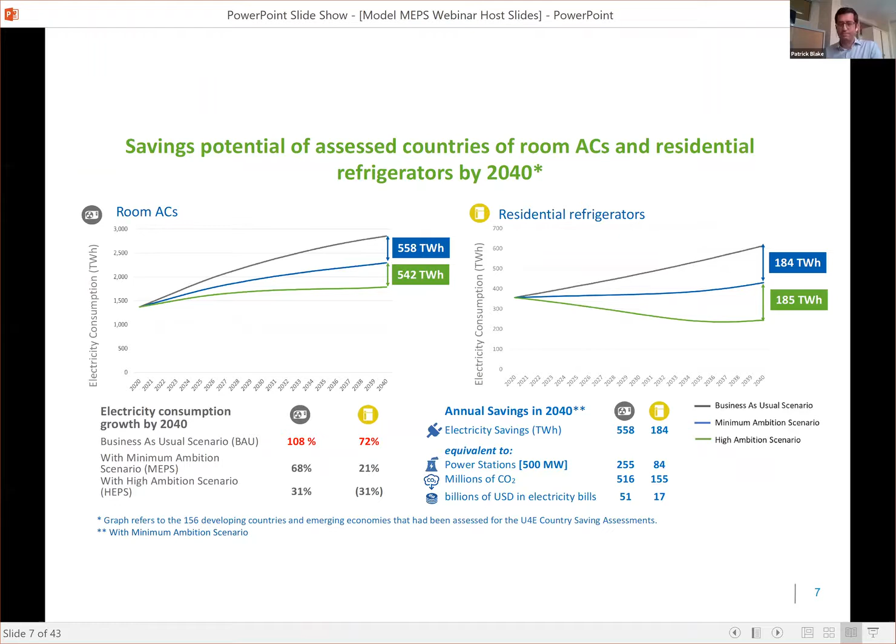By implementing minimum energy performance standards, particularly in the time with the COVID recovery, this allows for very quick savings opportunities for countries to help their consumers. Continuing on, please.

And we're working, and other organizations are working with individual countries, but also regional groups of countries to support them. And we'll hear more from Michael Kiza on the work in East and Southern Africa later today. Next slide, please.

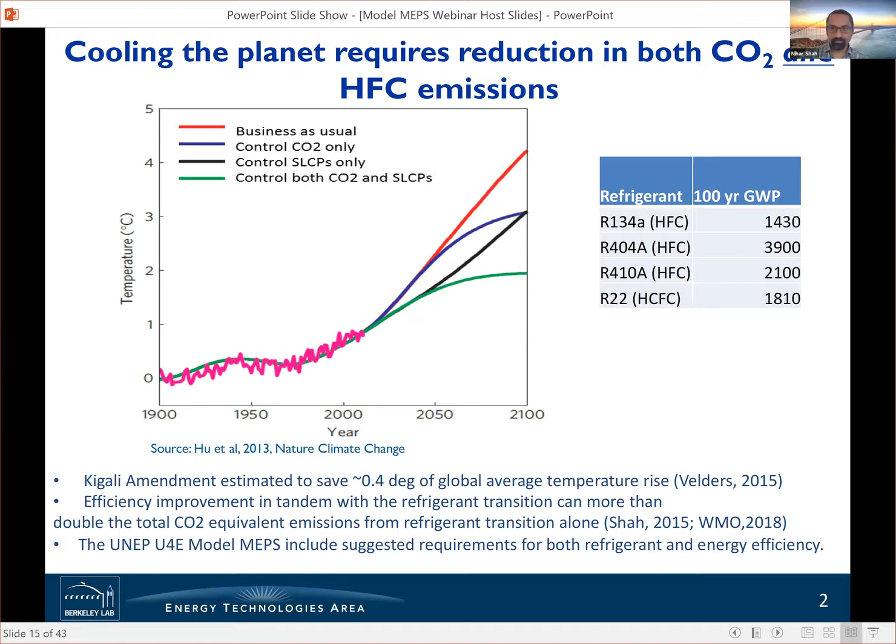So it's really important for us to manage peak load and to reduce the greenhouse gas emissions I mentioned previously, and that Patrick mentioned, to address both energy efficiency and refrigerant transition together. As Patrick mentioned, the savings, he had a number up to 2040, I have the number up to 2030 for air conditioners alone. Whichever way you slice this, this is a pretty big number, about 337 terawatt hours, which is about 154 medium-sized power plants. That would be a very large shift if we could actually pull it off.

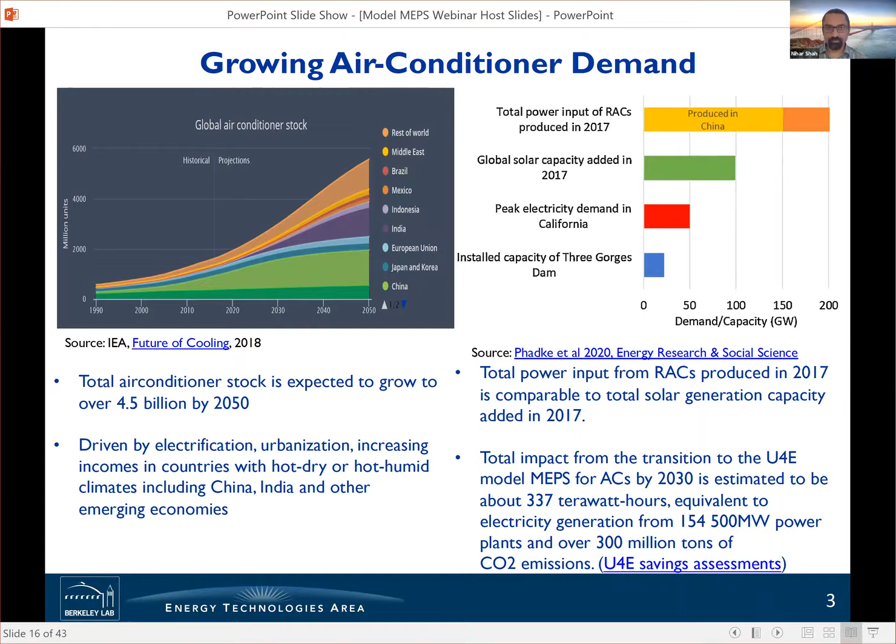Now, why would we want to do refrigerant transition and energy efficiency together? Air conditioners and fridges are often the first products regulated for energy efficiency. When you go to one of those countries that was a blank spot on the map, typically they'll ask what do you want to regulate first. They'll raise their hand and say air conditioners and fridges, because those are typically the ones that are widely deployed and also consuming a lot of energy in the household.

Also, both refrigerant transition and energy efficiency require redesign of appliances and retooling of manufacturing lines. So combining this in some fashion would allow us to save costs for consumers and manufacturers. That's part of the reason why we included requirements for energy efficiency and refrigerant both in the model regulations.

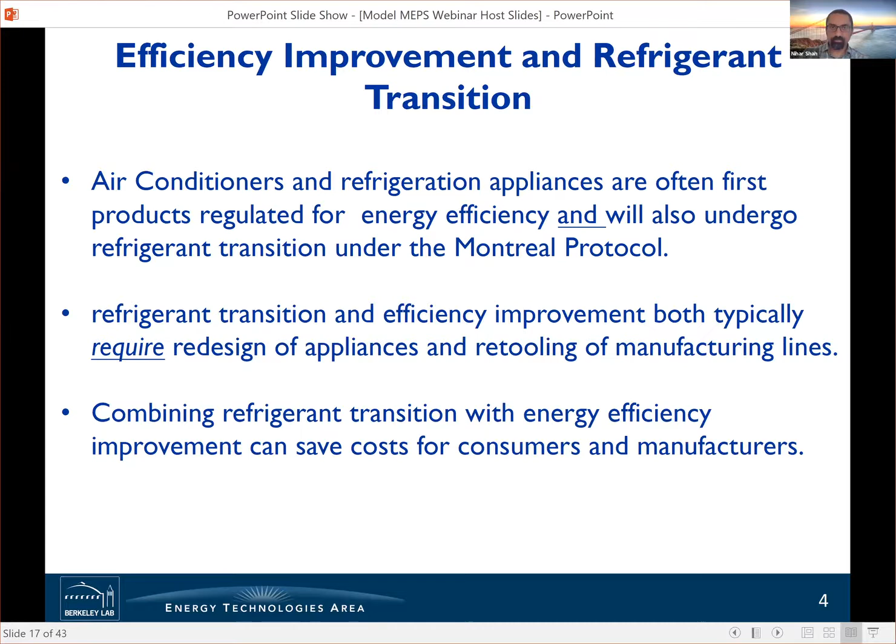I want to talk a bit about the actual requirements in the model regulations and our approach. I don't have a ton of time, so I won't go through the exact requirements, but I want to talk about the approach, which is that when we were looking at what levels of energy efficiency to set, we were trying to track all the various markets in the world and the best available technology, to understand what those trends might mean.

So what we did was essentially set the level at a point where we know these large markets are going in the future, for example China and India. India adopted a unified product category in 2016 for fixed speed and variable speed air conditioners, which led to the market shifting towards variable speed air conditioners.

That kind of approach is one we also included in the U4E model regulations, where the test procedure is essentially based on ISO standard 16358, which would allow a consumer to identify that variable speed air conditioners have higher energy savings.

Now, we also looked at where the energy efficiency levels themselves, not just the test procedure, but where the levels were lining up. And we found that various markets were again moving towards variable speed air conditioners.

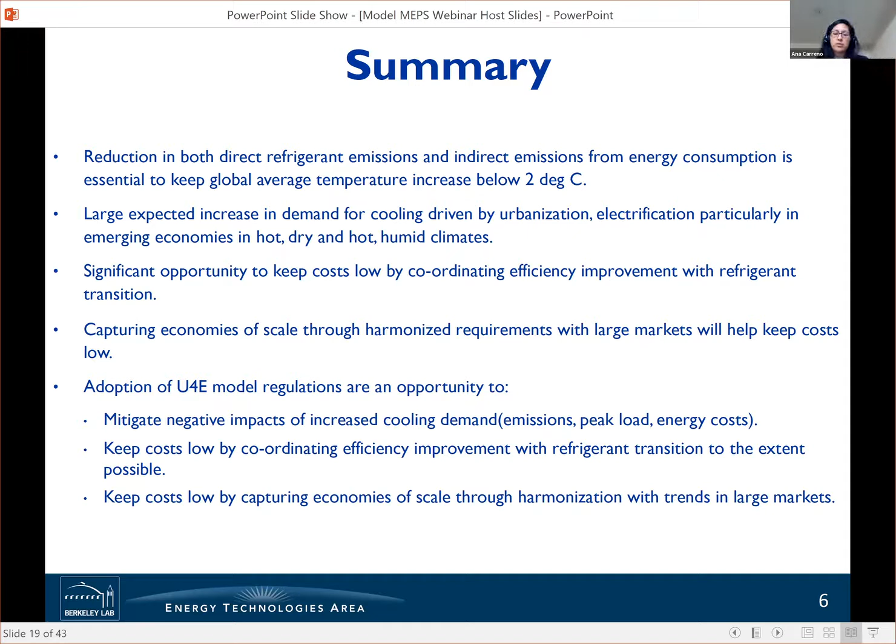Thank you, Nihar. Very important points—specifically the opportunity to combine the energy efficiency requirements with the transition to refrigerants with lower global warming potential to keep the cost of implementation down. I also like that you mentioned the importance of using a technology-neutral approach in regulations, specifically using the model MEPS. It's very important to set a single set of requirements regardless of the technology, so you can drive the market towards the most efficient technology and limit the inefficient ones.

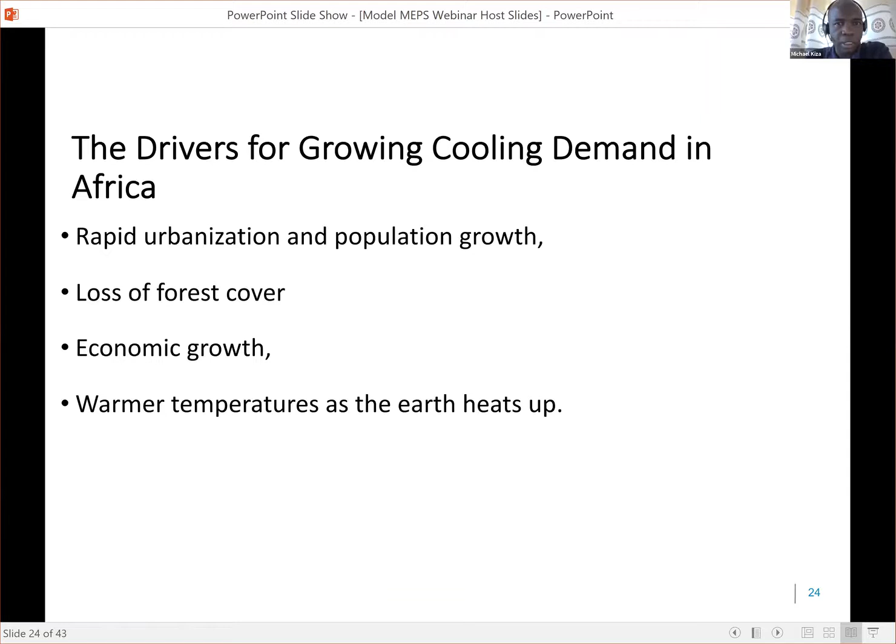Next slide, please. I just want to move a little bit faster.

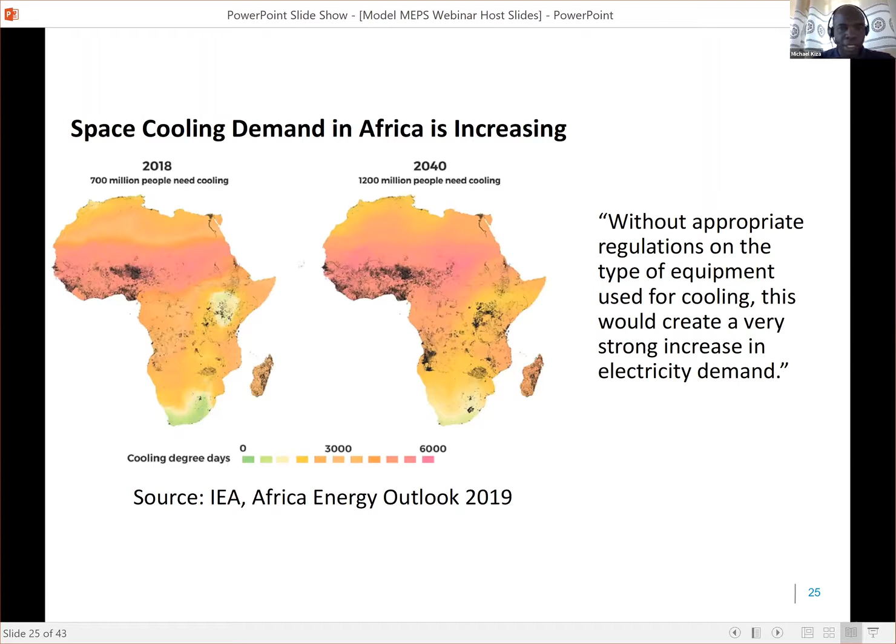As we see in the next slide, how does this translate into electricity demand? Please, next slide. Now, this is a work which Patrick mentioned before, and I zoom into Africa. What is the situation in Africa?

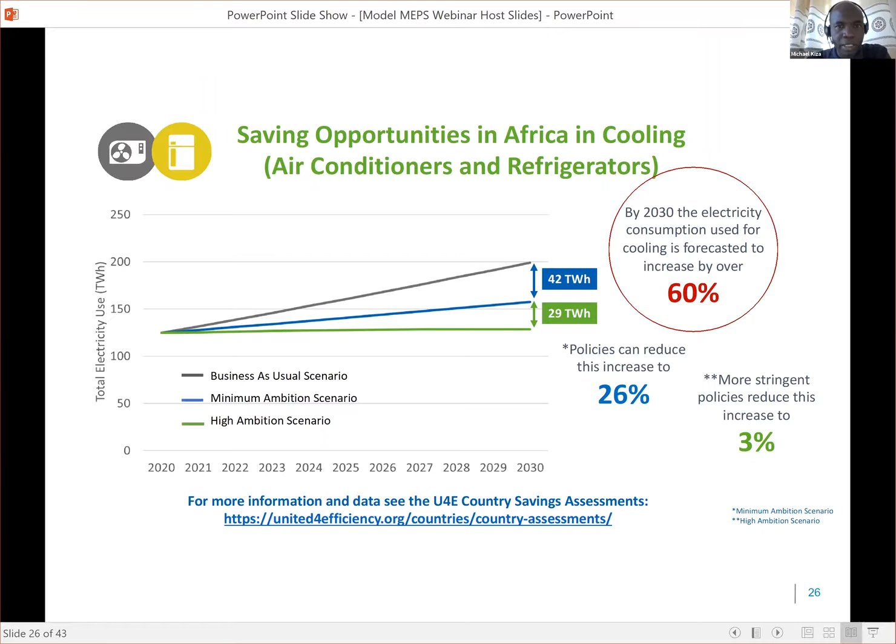So this really shows the importance of applying the regulations, the minimum energy performance standards. If you go to the next slide, we can see how these numbers translate further in terms of terawatt hours of electricity saved, the number of power stations and investment in power stations that we could save, and the cutting down of CO2 emissions that we can realize by applying this.

And in terms of money, most people think about money. Yes, you can see also quite a lot of money, $4 billion US on electricity bills that could be saved by the household. So this really shows that there is value in applying the MEPS.

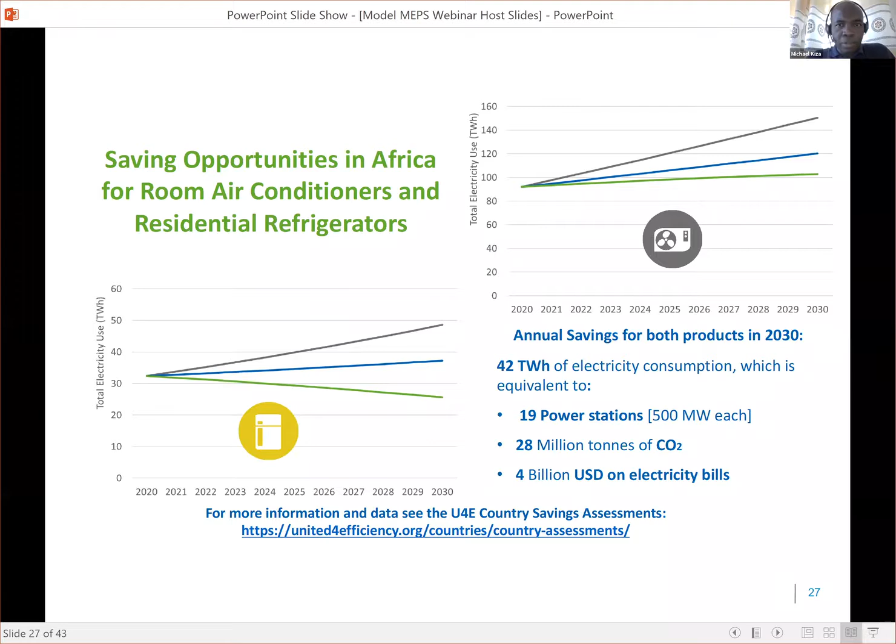So this is a very comprehensive work that is done by U4E to help us see how we can save. But now, what can we do? How can we achieve all this? But before we do that, let's have a look at what are the effects of the growing demand for cooling in the next slide.

Yes, so the cooling demand, as it grows, means also that our problems are growing. To meet the cooling demands, we see people in the African market resorting to inefficient technologies because they're a bit cheaper. And then you see the dumping of old used products. If you look at that picture, somewhere in the developed countries these are dumped, and they take them and find where they can find markets. So a lot of markets for these second-hand refrigerators and air conditioners exist in Africa and other developing countries.

A number of countries still do not have MEPS. In some countries, MEPS have been developed, but they are voluntary. They don't have enforcing regulations, including Uganda, where I come from - we have voluntary MEPS in place. Many African countries still have to put in place and enforce regulations to control the importation of ACs and refrigerators that use HCFCs. But what is being done?

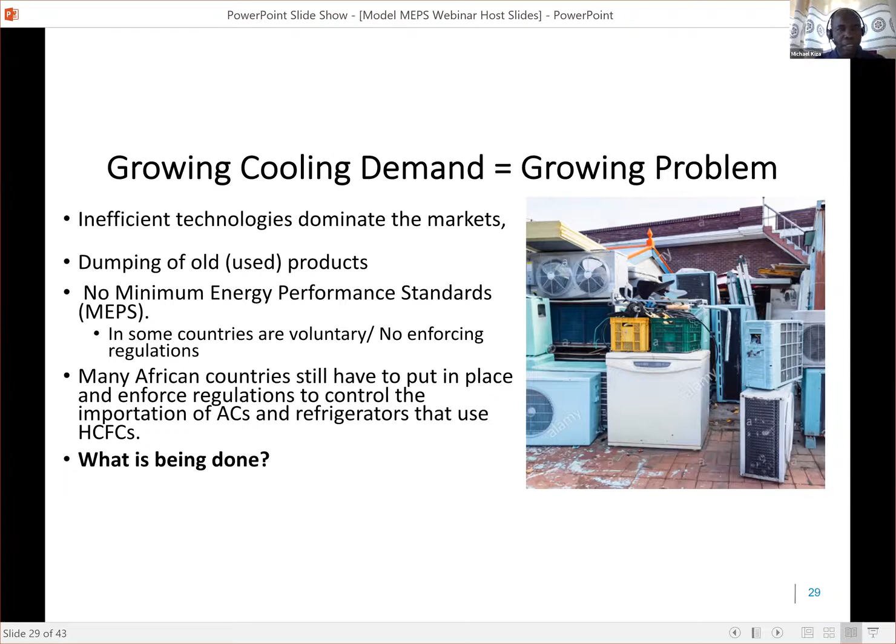Let's, in the next slide, see some good steps in the positive direction. Since 1989, we have the Basel Convention on the Control of Transboundary Movements of Hazardous Waste and their disposal, which is broader in its area of focus. It can control electronic waste, including electrical waste like refrigerators and air conditioners, and things like computers, radios, phones, and so forth. Focusing on refrigerators, this convention can also control the refrigerants in cooling equipment. It's good to note that all African countries, if I'm not mistaken, have ratified this convention, and it's enforced in all of them.

But unfortunately, still we see these products coming. Another positive development came in 2012 when the EU came up with a directive aimed at curbing illegal dumping of used refrigerators and other electronic waste in developing countries. It entered into force, but still we see the importers are very shrewd. They can put this and say these are my household effects.

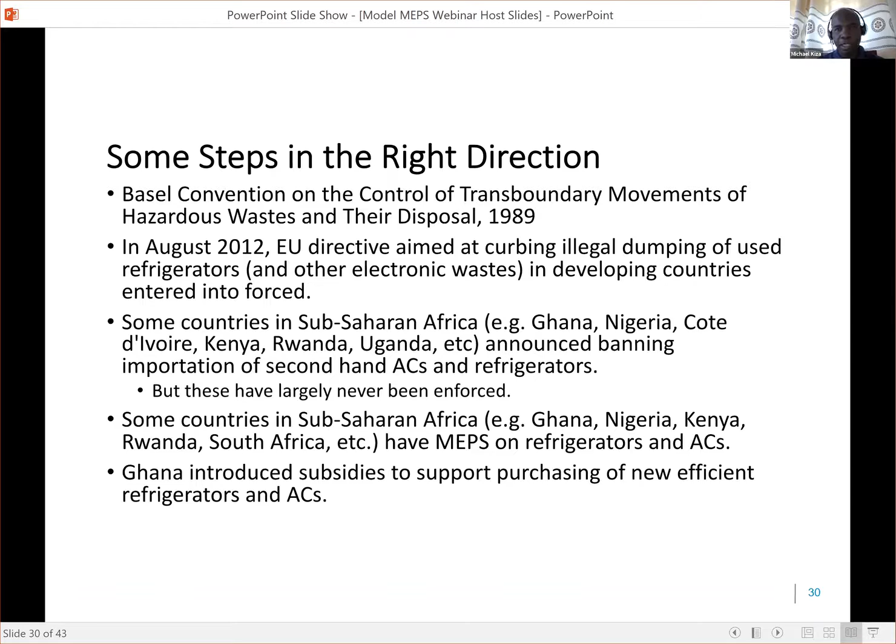So when it comes to energy efficiency, yes, we do things to help the regions that we work in, all the countries in the region, to try to ensure that no one is left behind when it comes to policy and regulatory environment to promote acceleration of market transformation for energy efficiency products. We do all these things to make sure that the countries that form these regional blocks are at par. Next slide, please.